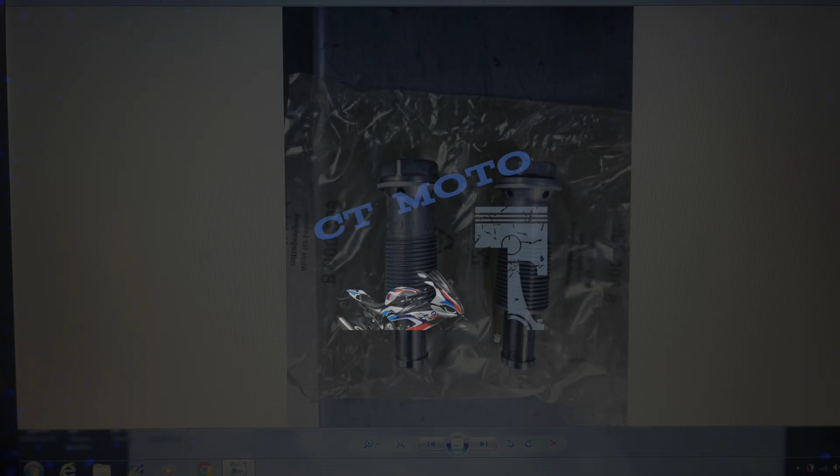In today's video we're going over a subject that a lot of people are talking about. Unfortunately, there hasn't been an official recall for it, but more of a service bulletin that came out. In this picture that I'm showing you right now, you see two pictures of the timing chain tensioner. Now they both look very similar.

From the outside, aside from the part number that you can see over here, they look identical. The only difference between the OEM part that came with our bikes and the updated part is that the old part has an internal spring, I believe. Now, supposedly over 10,000 RPMs for extended periods of time can cause the spring to fail.

The new tensioner is fully hydraulic, and that's why they are doing the replacement of this part. It's free, it's going to get covered under warranty. When you go to the dealer, you're going to probably be there for at least an hour, maybe an hour and a half or two, depending on how long you got to wait.

But the majority of the waiting is just letting the bike cool down so that the oil can go all the way down, and for the bike to cool down to take off the panels, and then they can start taking out the tensioner. Now, like I said, not everybody knows about this, so I figured I'd make a video about it. It is kind of important.

Now, I do want to say some things about the OEM cam chain tensioner. My bike is a 2020 S1000RR, which is a K67 model in the USA. And I put on definitely 7,000 miles of hard riding, which involved a lot of higher RPM rides.

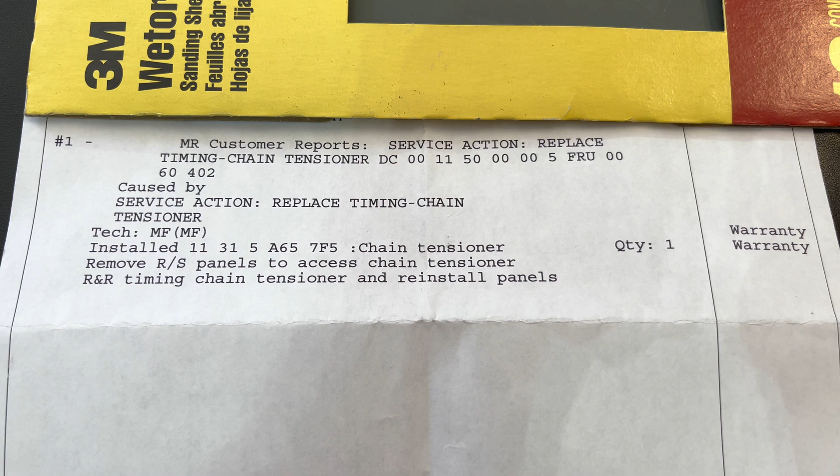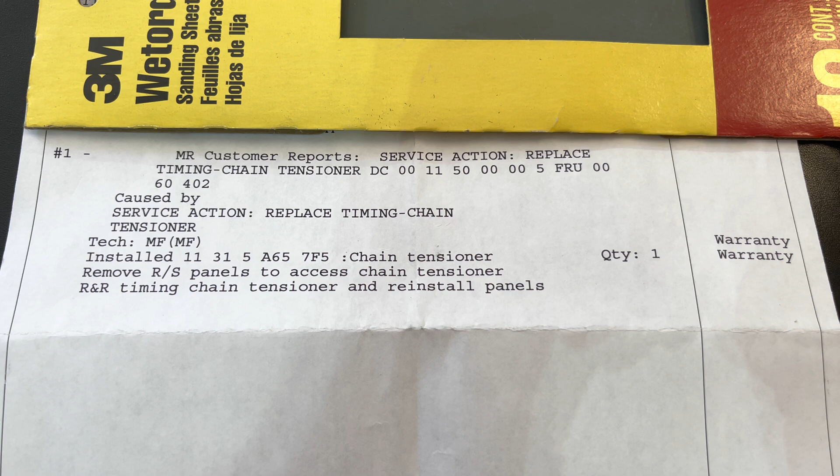and they don't have to do that yellow paint mark anymore, so if you don't see it, it's not a big deal. You just want to check the invoice that you get from your dealer. I'll show you that now. All right, so here's what the paperwork said. Customer reports service action, replace timing chain tensioner, the number, blah, blah, blah. So obviously this is a service call, and they installed a different part number,

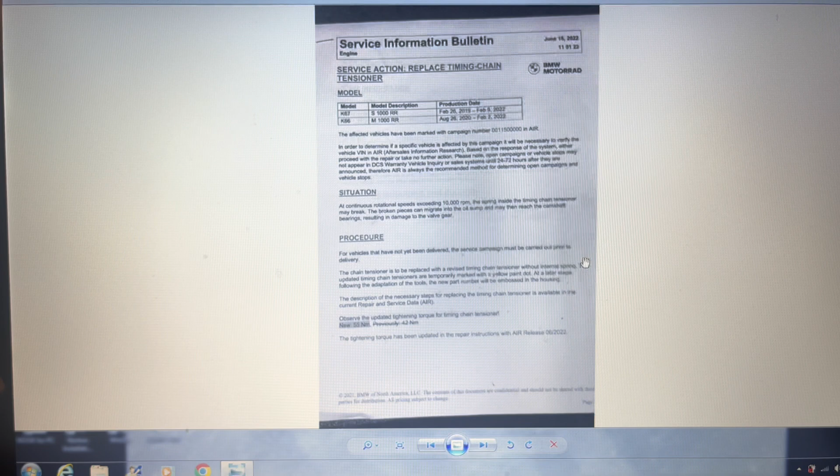11315A657F5 chain tensioner. Alright guys, as you can see in that little clip, that is the new updated part number. Now I also want to show you something else. This is the service bulletin information. You can see it is for the K67 model S1000RR. That's the M package, or any of them.

With a production date of February 26, 2019 to February 9th, 2022. It is also for the K66 model, and that is the M1000RR, with a production date of August 26, 2020 to February 2nd, 2022. So basically, this kind of shows you what the service bulletin is.

The dealer's probably not going to call you. You may get something in the mail. I didn't get it. I just heard about it word of mouth. And honestly, when I talked to the dealer about it, they didn't know about it until 2 weeks or something from that date that I got it done. Now, obviously, it'll be replaced.

The updated tightening torque for the timing chain tensioner is 55 Newton meters, and the previous one was 42 Newton meters. Why that is, I have no idea, but obviously they upped the torque amount on it. So get your appointment in and get it done. If you have a production date bike later than what is shown on the service bulletin, then you're good. You don't got to worry about it.

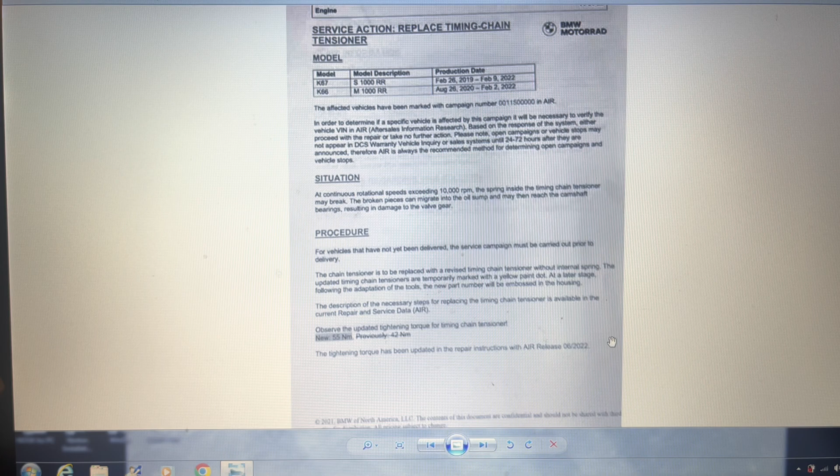If you're not sure, you could always call the dealer. They can run your VIN number and they will let you know if you have the updated cam chain tensioner already installed. So we'll just zoom in on here so you can see a little bit better, just so that you guys can read it. So I'll just leave this on screen for like 30 seconds. You could pause the video to fully read it, but it tells you what's going on in the service bulletin.

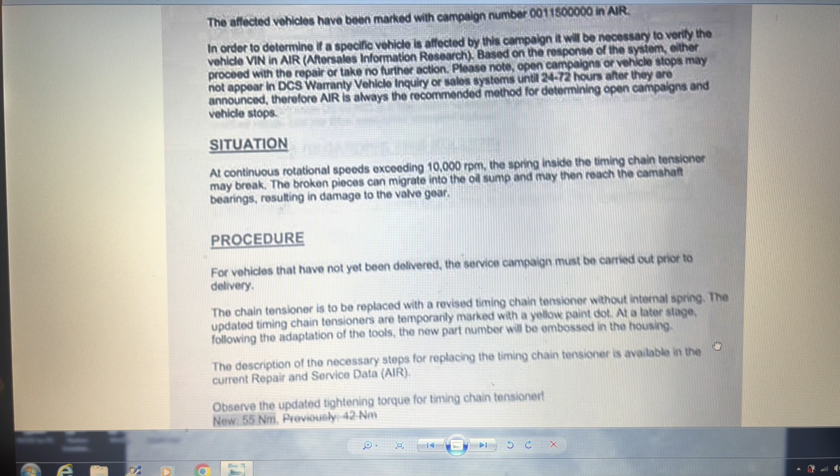Like I said, I didn't get this. I saw it on the forums, where it was released first, and then it started hitting the Facebook pages. So I'm making this video to inform everybody about what's going on with your bikes. Now, some people were asking, is the bike going to be quieter when it's running? From my personal experience, my bike sounds exactly the same as the day I got it, after I installed the full exhaust and everything. It's not any quieter. It's just to prevent any type of failure from the spring that was in the original tensioner.

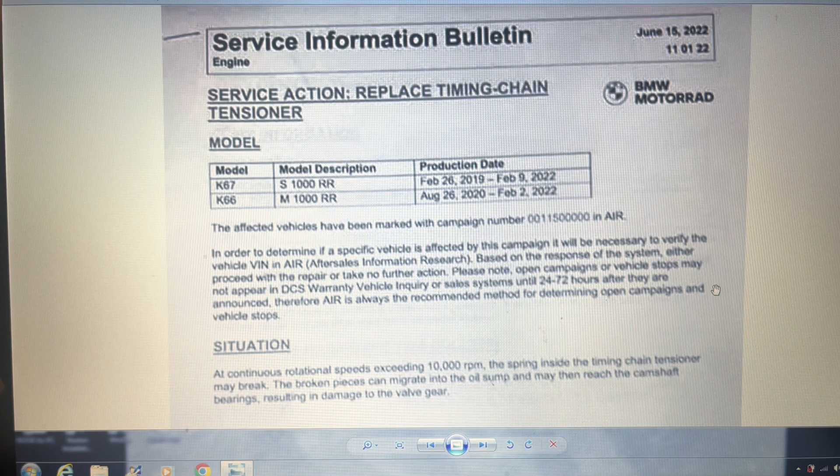Now, another thing to note is that you're not getting a new chain. You are just getting a new timing chain tensioner. So it's just the tensioner that is getting replaced, not the chain. I just wanted to clear that up as well. But yeah, guys, make sure you get this done. Set up your appointments. Like I said, these things look identical. When I saw it at the dealer, you could not tell the difference at all. Unless this thing was cut in half, then you might be able to tell the difference. But to the naked eye, you couldn't see anything different.

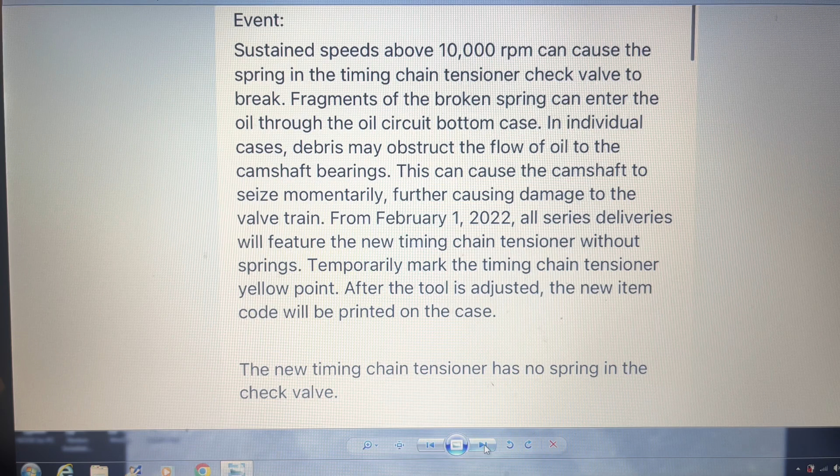But yeah, like I said, I had that up before, so you could pause it if you need to and read it. Definitely get it done. And like I said, this is for the M1000RR and the S1000RR. It doesn't matter if you have the M package or just the standard one. It's the K67 and the K66, for these production years. So make sure you guys check that out.

Alright guys, so that's going to do it for today's video. I just wanted to get this information out there because a lot of people don't know about it, and a lot of people have not got a mail stating that this needs to be replaced, and probably some of the dealers don't really know. And that's the great part about the forums, and that filters into some of the Facebook forums as well, because it's usually found out through the forums first, since we have people that are really diehard super fans, and they have connections, and they find out this information before a lot of the public and even some of the dealers.

I mean, I remember one time I mentioned something to one of the dealers, and they had no idea what I was talking about, and lo and behold, here we are, and this is it. So set your date, get your appointment in, and obviously get it done if your bike falls between those years. You could still ride your bike.

Like I said, I highly doubt it's going to fail by the time that your appointment is set and when you get there. Is there that chance? Yes, there's that very, very slight chance. I mean, the majority of people don't really stay in 10,000 RPMs and up for the long majority of time of riding.

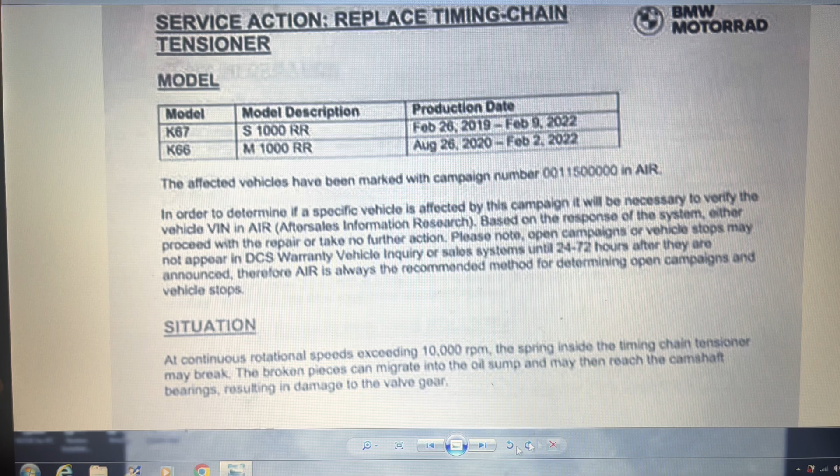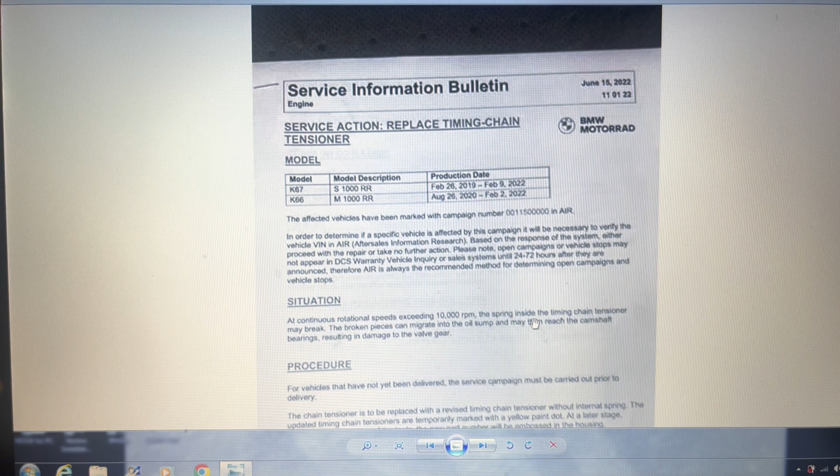And it's kind of crappy that they aren't sending emails or letters out immediately when this was found in, what was it, September or something? Or not September. Where the heck was it? Let's see. June 15th, 2022, this is apparently when the service bulletin came out. So it's basically end of August, beginning of September right now, and I haven't got this information at all sent to me via mail about the update or anything like that. So this is just for you guys, and I hope it's been informational.